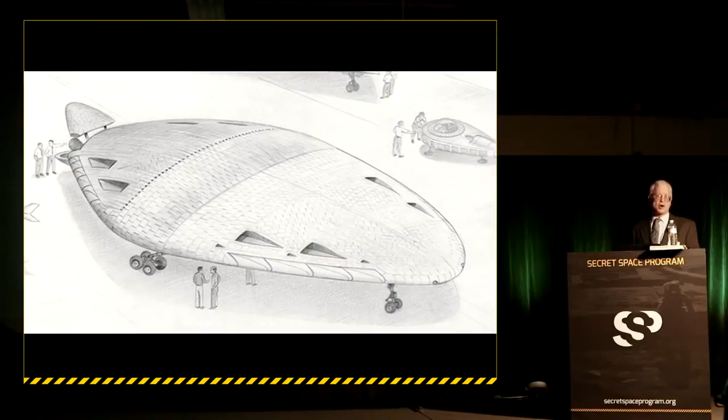This is the first generation Aurora. It was a remotely piloted vehicle, built by Lockheed Martin. This object you can see in the distance was actually taken from a Polaroid photograph, taken in 1984 near Cedarville, California, up in the northeast corner of the state.

Now for me, this is one of the other vehicles here. This is a drawing put together by my friend Michael Schratt. This particular vehicle I'll go into a little bit as well. It was part of a crash recovery in East Germany.

Now, after I got out of high school, I realized that in order to go to... okay, there we go, sorry about that... one of the things I was going to need to do to go to the college I wanted to go to, which was a place called Art Center College of Design in Pasadena, I wanted to design cars for General Motors.

And this was the premier college that all the designers would go to. At $2 an hour minimum wage at the time, I knew there was simply no way I could afford to save up the money to go there. So I decided to join the Air Force and get the GI Bill to help pay for my college education.

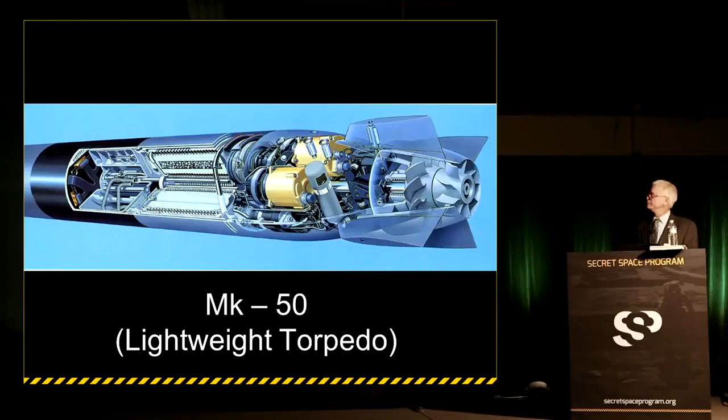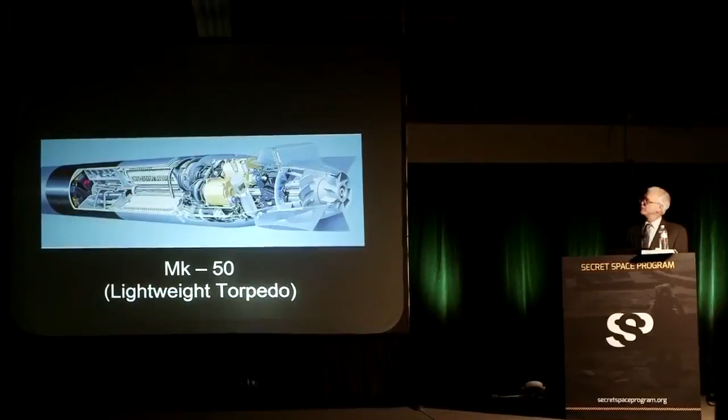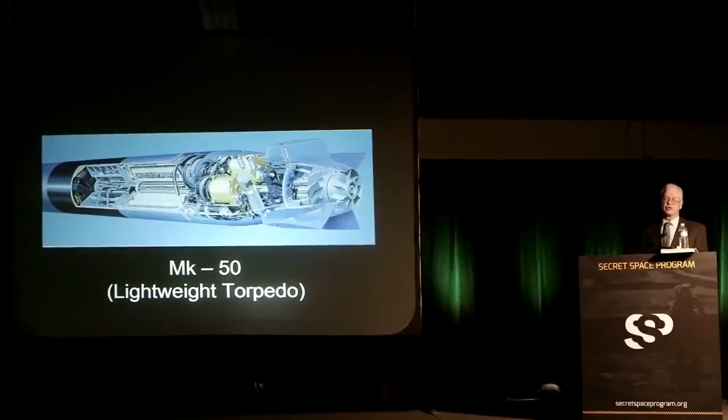These are some of the paintings that I did. This is a cutaway illustration of a propulsion system for a lightweight torpedo that basically involves a lithium core that is ignited once it drops into the water, and that heats up an oxidizer, flows through here, creates high temperature steam through these heat exchanging tubes, goes through a transmission, drives a generator, and also a couple of counter-rotating props in the back.

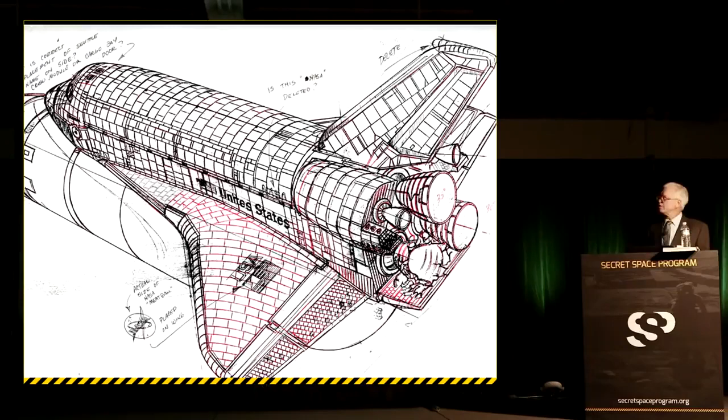Being able to figure all that stuff out, and I take a lot of pride in the accuracy of my work, involved a certain amount of engineering. Even though I'm not an engineer, I don't have an engineering degree, I spent an awful lot of time studying how things are put together, how they work, what makes them function, what the physics and the engineering are behind these systems. Whether it's mapping out every single tile on the space shuttle or doing the cover of a magazine on the TR-3.

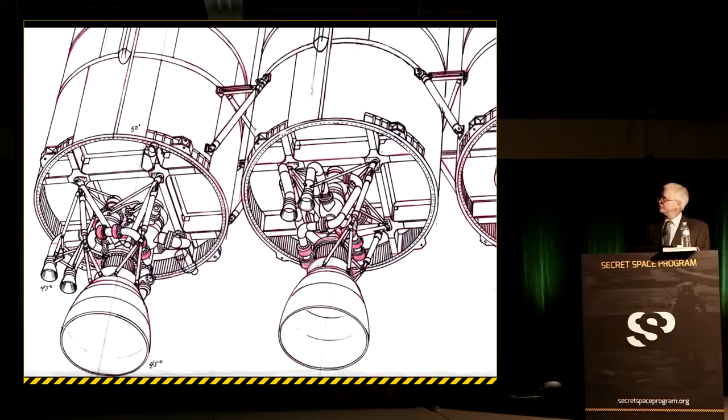Eventually, while I was working in the industry, I had the opportunity to make contact with a lot of people in the military, some of whom expressed an interest in having some of my artwork in their squadron ready rooms. So I was able to arrange to get what are called media orientation rides and go up in these planes and see how the pilots handle the stress of flying.

I asked myself years and years ago, millennia ago, if man had never taken the time to study flying insects or birds or bats or any kind of flying animal on this planet, would they ever have had the inspiration to think of flying, to come up with the idea? I kind of wonder whether or not we ever would have been able to get off the ground if we hadn't had those other naturally occurring creatures to give us inspiration.

As we began to learn how to fly, as the Wright brothers and all the other pioneers put together these machines, it gave us this capability. Of course, there was a military application. The first was probably seen during the First World War in Europe, using aircraft for observation or for bombing and harming the enemy troops.

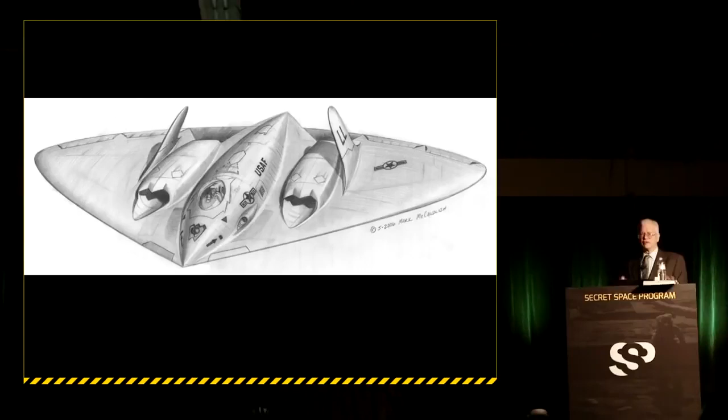There are ways that you can modify the inlets for the engines so that when a radar beam from a distance is looking at the sky where the aircraft is, it's harder for that radar to get into the inlet where those metal turbine blades are turning and reflect a lot of energy back, letting the people watching know that you're there. Applying these different techniques, looking for ways to make an aircraft perform better and do it very quietly, very stealthily, even in the materials that are used.

I'm sorry, I pushed the wrong button here.

These aircraft have a number of ways in which they can be deployed. They can be deployed by flying right off of a runway, or they can be deployed as a parasitic aircraft, as in this case. This is the second generation Aurora on a carrier vehicle.

There have been a number of questions about what the name of this vehicle was, but for me, the discovery of its reality was kind of what led me down the road to being aware, or suspicious anyway, that there was a kind of secret space program.

The way this happened, I was approached by Lockheed Martin - I think at the time they were still referred to as only Lockheed. The particular division that approached me was working on behalf of the Skunk Works division. They said we have a new aircraft that we want to build, and we need to get the appropriate funds from the government.

So we need you to create an illustration for us that shows an aircraft that's really fast, something that looks dynamic, very, very fast. At the time, I was reading trade journals like Aviation Week and Space Technology, and I knew one of the up-and-coming technologies they were talking about was something called scramjet technology, shorthand for supersonic combustion ramjet.

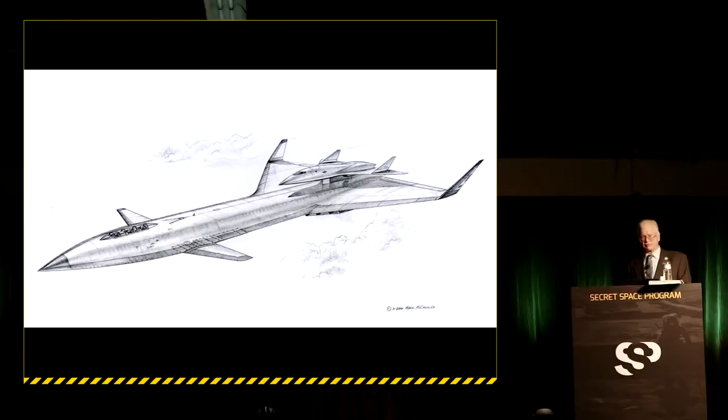It turns out that shortly after I submitted a sketch of this particular aircraft, they decided they were just going to completely scrap that. So I wound up doing an illustration of an aircraft something like this.

There was one proposal where it might actually be possible to deploy this particular aircraft right out of the back end of a flying C-5A Galaxy. This is sort of my conceptualizing of how many you could actually fit into a C-5, knowing the size of this aircraft.

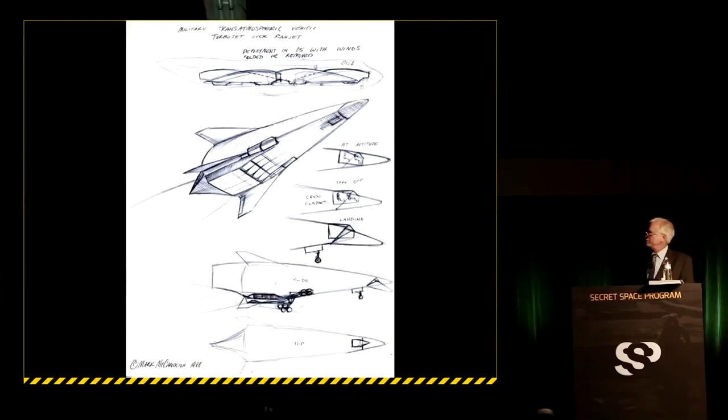It had a scramjet nacelle on the ventral surface, and also one on top. This particular version only had one underneath. Because of the shape of the aircraft, it made it very peculiar, or awkward, where the landing gear would come out in order for this thing to work properly.

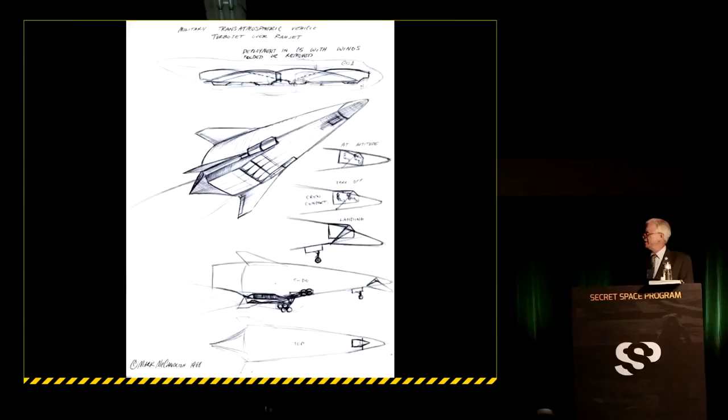Now, about the same time, there was a lot of talk about an aircraft vehicle crash that had occurred somewhere near Barstow, California. There were some people describing different features of the aircraft. There was a fellow that I met and talked with who was

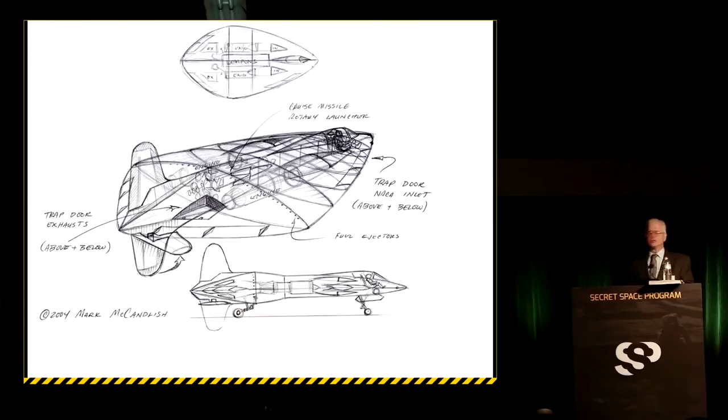friends with a number of the astronauts, and they were describing how a particular astronaut was flying a Learjet, ferrying it from one location to another through the state of Nevada. He came out of the clouds and found himself sitting slightly above and behind an aircraft that looked just like this. Now, the interesting thing about this aircraft is that it had some very strange features.

It had engines buried inside the fuselage with a sort of NACA duct inlet. There was kind of a slot in the back. It looked like there was maybe a trap door, control surfaces along the bottom, exhaust diffusion. But it also had this very interesting feature, and most people don't know this: the predecessor of the SR-71 Blackbird, the YF-12A, which was kind of a strategic aircraft used for missile delivery, also had a folding ventral vertical stabilizer, or tail. So this aircraft obviously had that same feature.

The vehicle was all black, or sort of a deep gray. As the pilot was flying along, looking at this thing through the clouds, he suddenly realized that if he had not seen it directly, he might have collided with it as they were flying through the clouds together. So he gets on the radio to his ground control and says,

I've got some traffic up here, why didn't you warn me? And they said, well, there isn't any traffic up there. And he says, well, of course there is, I'm looking right at it. It's black, shaped like a flattened-out football, no wings to speak of, two tails, one above, one below. There was a slight pause in the transmission back and forth, and suddenly the pilot turns around, looks out the window, registers an expression of surprise and anger, banks into the clouds, and disappears.

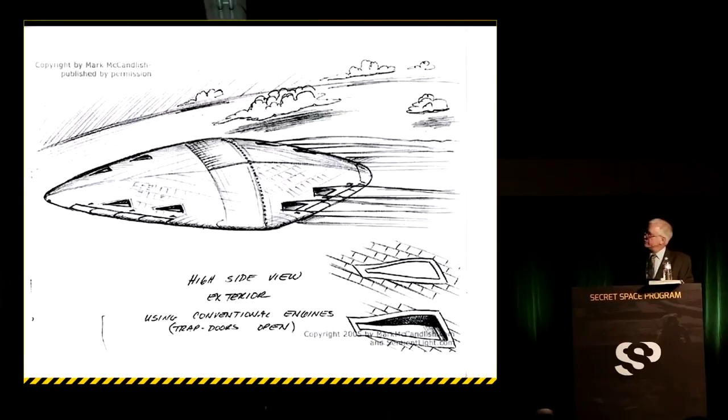Now, one of the things this particular aircraft had that wasn't immediately evident was a ridge that ran laterally across the widest part of the aircraft. And on that ridge were a number of what looked like fuel ejectors or fuel injectors pointing outward.

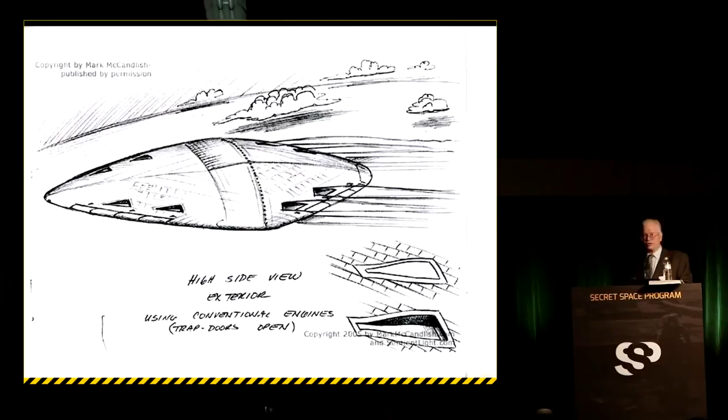This aircraft was being described within the industry as a vehicle that would produce an exhaust trail, the so-called 'donuts on a rope' exhaust trail. It seemed to imply there were two different propulsion systems in use to get it up to speed. Nobody really understood what they were or what made the aircraft function the way it did.

As it happened, I was asked to do a painting for Popular Science on the so-called Mach 6 spy plane, and it went into details about seismic events in Southern California that raised the curiosity of some people watching what was going on.

I remember at the time, this was in the late 1980s, early 1990s, that you could go out into the high desert of Southern California at night and see these things flying overhead, flying back and forth. When the sun was just below the horizon, it was dark out, but there was something still up there. You could see it moving, and moving very quickly.

About the time I did that illustration for the magazine, I was contacted by a colleague, a friend I went to college with, and I invited him to go to an air show at Norton Air Force Base in San Bernardino, California, about 75 miles east of Los Angeles. The Thunderbirds were going to fly, and it was a bit of an overcast day, but in the end I wasn't able to attend, mostly because I had to complete another illustration for a client over the weekend.

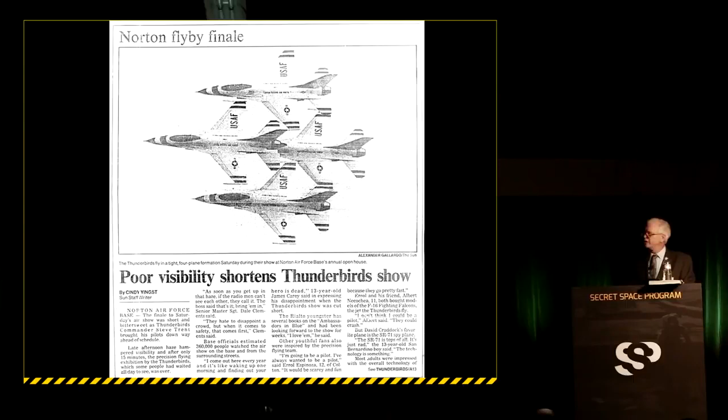As they were going into the hangar, the gentleman turns to my friend and says he just realized there are some aircraft on exhibit here that he's not cleared for, security-wise. 'You are not cleared to see these aircraft. So just enjoy the show, walk around, listen, take a look, but don't say anything to anybody.'

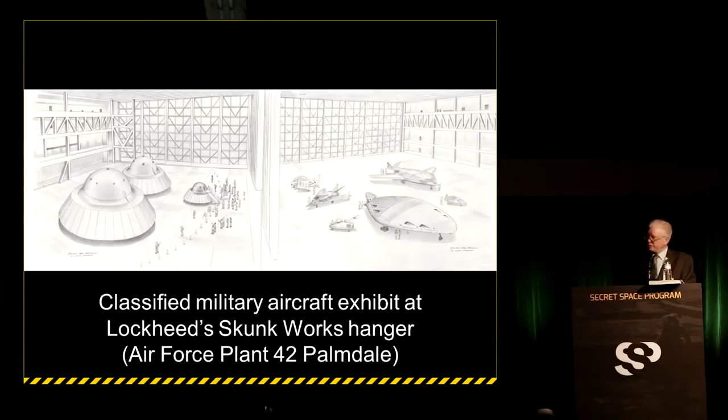Oh, I'm sorry, right here. This particular vehicle here, this is kind of a close-up, a rough close-up.

It was sort of an answer to or a follow-up to the A-10 Warthog, which was an anti-armor aircraft. It's a vehicle that carries a very big Gatling gun, fires thousands of rounds per minute, and is very durable, very hard to take out of the sky. It's very heavily armored, with a big gun that sits inside of it.

This aircraft was designed with a very unusual kind of wing. In aerodynamics, they have something called the Coanda effect. Basically, it involves blowing air across the surface of a wing to provide lift rather than just relying on the movement of the wing through the air to provide that same lift.

So the design of this aircraft was that they came up with a way of mounting the engines above and slightly ahead of the wing, using high-temperature alloy shaped like a flattened funnel that blows right over the wing. When the wings are all rotated in sequence, it forms a smooth ramp that the air can flow down, going from horizontal, following the surface of the wing with this Coanda effect, a kind of aerodynamic adhesion. It redirects the thrust of the engine to a point where it's pointing almost straight down, right about where the center of gravity is for the aircraft.

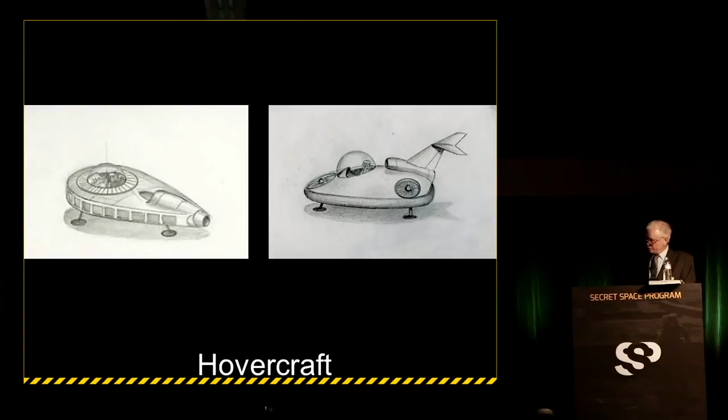The hovercraft were kind of unusual. There was one that had a jet engine in the tail, kind of a teardrop shape, and around the perimeter it had a series of little trapdoors that would open and close as it was flying along. This jet engine also had a transmission connected to a set of counter-rotating turbine blades that surrounded what amounted to a bubble-type cockpit, almost like something George Jetson would be flying in one of his cartoons.

This one over here, I've actually seen a version very similar to this in one of the popular science magazines, where it had a turbine in the front and two in the back, one on either side, driven by this particular engine through a transmission of sorts. It had the same kind of sphere-shaped cockpit too.

Senior Peg was the code name given to the development of the advanced technology bomber, and this was Lockheed's version. You can see it's kind of a derivation of the F-117A. It has the same kind of faceted surfaces, which help reduce the radar cross-section, or the amount of radar reflected back to an antenna from a source inside enemy territory. It had flush inlets on either side of the cockpit with a screen over them to prevent the turbine blades from reflecting a lot of energy back out to a signal source.

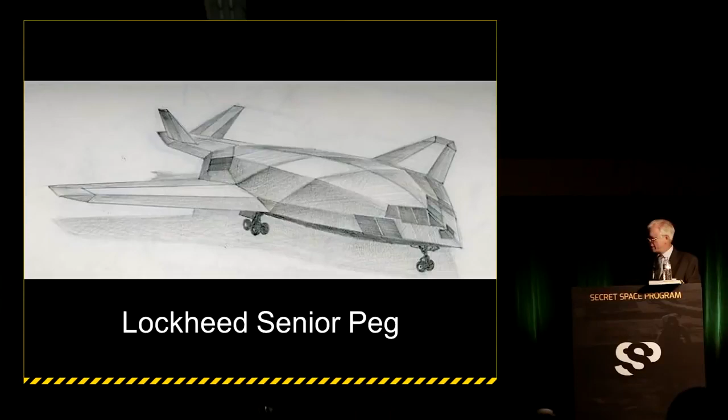But this here was one of the more interesting vehicles, and you can see some of the stats on it down below. This was probably one of the largest unmanned weapon systems built to that time. From my different sources in the military, this aircraft, known as the first generation Aurora, nicknamed the Pulser, was entirely covered with space shuttle tiles.

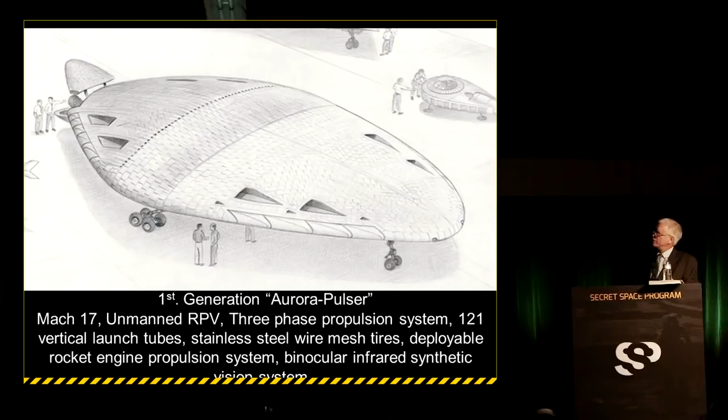You can see evidence of the tiles all around the surface of the aircraft. Just like the aircraft I showed you earlier that had the tail above and below the fuselage, this aircraft had NACA duct style inlets for 4 engines and 4 exhausts, both on the top and on the ventral surface, or the belly, of the aircraft.

After I discussed this particular weapon system on Coast to Coast with one of the hosts who was working that program, I received some email from a number of sources indicating there were inlets and exhaust ports both on the top surface and on the ventral surface. At the time of the exhibit, my friend said he could only see the underside of the aircraft. He couldn't see the top of it because it sat up kind of high off the ground, so he didn't know whether there were 8 exhaust ports or only 4.

It turned out that one of the people I corresponded with after doing the radio program said they had been jogging late at night during an evening when an aircraft like this was leaving one of the United States Air Force bases in Great Britain. He said what was unusual is that when it took off and lit up the afterburners, which dumps a lot of extra fuel into the exhaust stream, you see a bluish glow coming out of the exhaust. He said there were 8 ports, which helps point out that you have 4 above and 4 below.

So we knew that was true. One of the things that was interesting about this aircraft was that it had that same system of fuel ejectors not only on the top surface right along this ridge, but also on the ventral surface on the underside as well. So here we have two different propulsion systems incorporated into one aircraft.

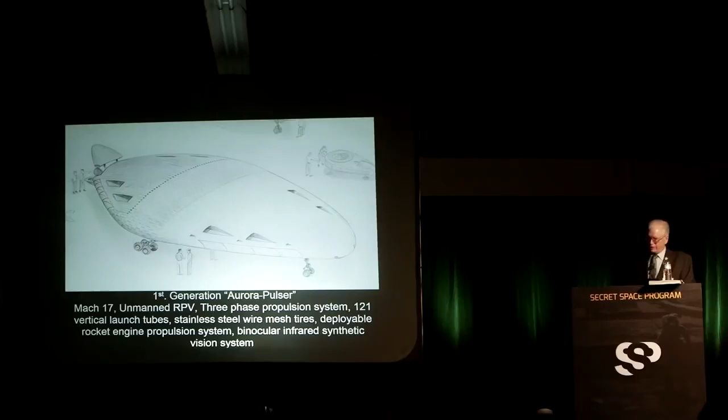Now, one of the things you don't see in this particular illustration, but is a little more evident in this one I did for Aviation Week—the perspective on the underside is a little off, these should be flattened out more—but there are 121 vertical launch tubes in the belly of this vehicle. Each one is capable of carrying something like a cone-shaped reentry vehicle, like a MIRV, which also suggests deployment from outer space.

The way the system would work was remarkably simple. It had a kind of tile with explosive bolts holding it in place on the outer skin, and sitting behind it, the weapon would be held in place. It's not shown here, but I've subsequently learned there was a three-piece fiberglass sabot which would hold the weapon straight in the bore, so it would always point a certain direction. The ingenious and simple aspect was that when the explosive bolts on the outside were ignited, the tile would disintegrate and blow away.

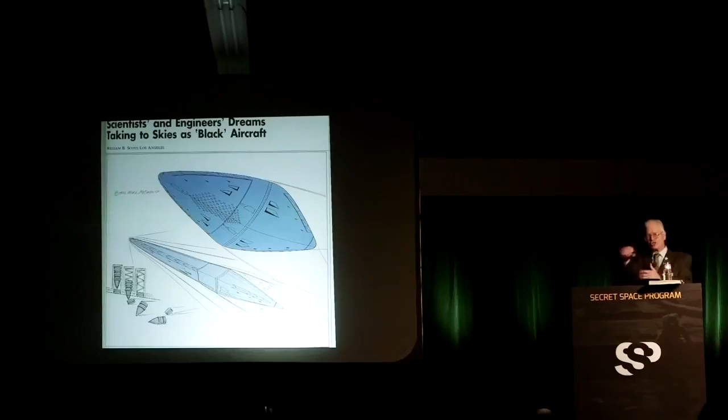And when it did, there was a big coiled spring about 12 inches in diameter behind the vehicle that would push it out of the hole. Right behind the reentry vehicle, another tile would slam down into place and cover up that hole again, almost in a tenth of a second. The reentry vehicle would then stabilize, because of its center of gravity weights and shape, in the airstream, go into the atmosphere, and be able to acquire its target and do its job.

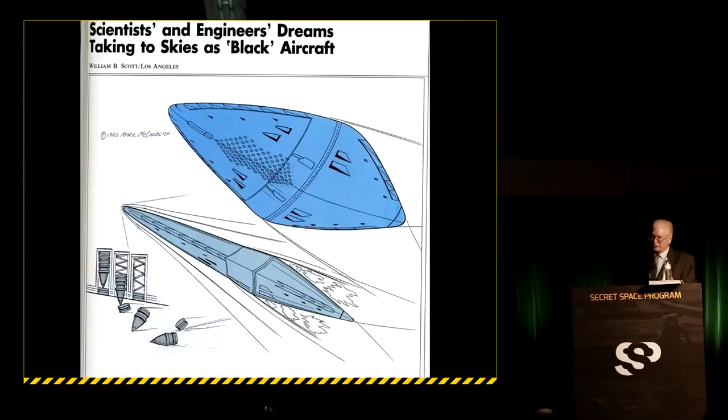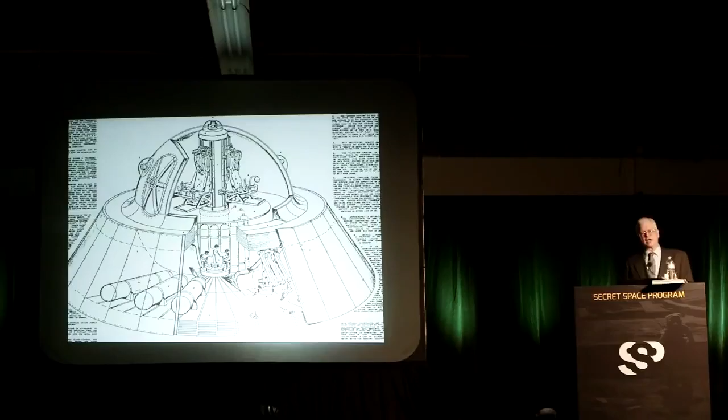If you think about it, there's a process used throughout industry, and even in the dental industry, called centrifugal casting. What you do is create the mold and whatever components you want to go in it. You have a sprue in the middle, and then you take the molten component and pour it into the center of the mold through a funnel-shaped opening.

If the mold is spinning, the molten material flows out to the outer edges and pushes away all the little air bubbles that might get trapped, and they migrate back to the center where they can be drawn out. So you wind up with a single casting with all these components in it that will not have any air bubbles, inclusions, or impurities that could cause the system to short out when you're using millions and millions of volts of electricity.

But even so, when I computed the total weight of all that metal and quartz, 24 feet in diameter and 12 to 14 inches thick, it worked out to something like 24,000 pounds. So you have to ask yourself, how can something that weighs 24,000 pounds get off the ground? Especially if nobody believes that something using the Biefeld-Brown effect could actually levitate something that heavy.

One of the things the witness said was that the greater the mass of the dielectric, if you dope it with other materials like uranium or something of that nature, you can actually enhance the effect. So here again, material science comes into play. It becomes very, very important in how things happen.

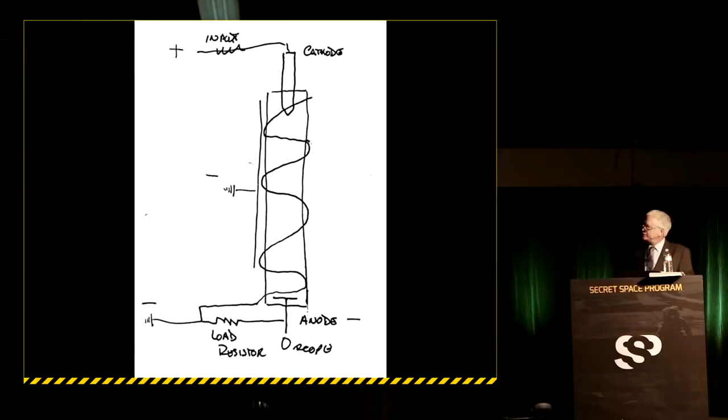So I started looking at what zero-point energy is, where it comes from, how it can be manipulated. I looked at some of the papers written by scientists like Bernard Haisch, Alfonso Rueda, Hal Puthoff, Daniel Cole. In the early 1990s they wrote a number of papers that actually described this, and you can see the similarity between the two things. You can see that there's clearly a design similarity.

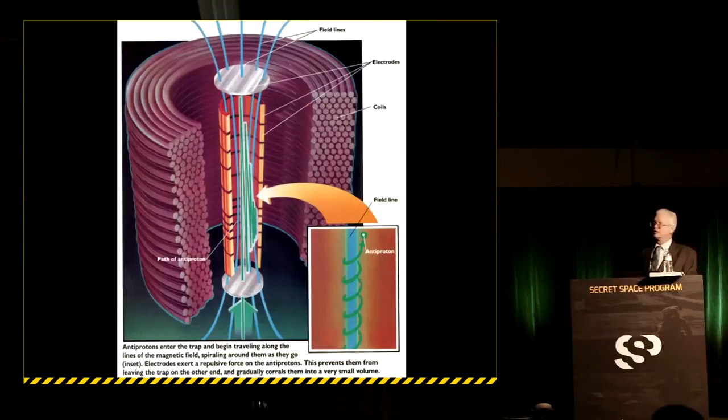And yet I looked for other possibilities as well. The possibility that we had something like an anti-proton trap going on here, where there might be some aspect - you have the same kind of coils going around the outside, a central column, a way of trapping antimatter. I thought that this might be something like the so-called antimatter drive used in some of the Star Trek vehicles. So I began conceptualizing, began looking at different ways that you could actually make this system work.

Somewhere in the late 1990s, early 2000s, I came across a number of books that described - Joseph P. Farrell, who's another one of the speakers here, had found some historical records after the Second World War that described a device being worked on by the Nazis in the Wenceslas mine up in southern Poland, called the Nazi Bell Project, or Die Glocke.

That particular system, based on the documents that were found, was made up of a pair of counter-rotating cylinders, one inside the other, with a coil that went around the outside. And electricity was being fired through the system. So I started looking at ways that you can make that work.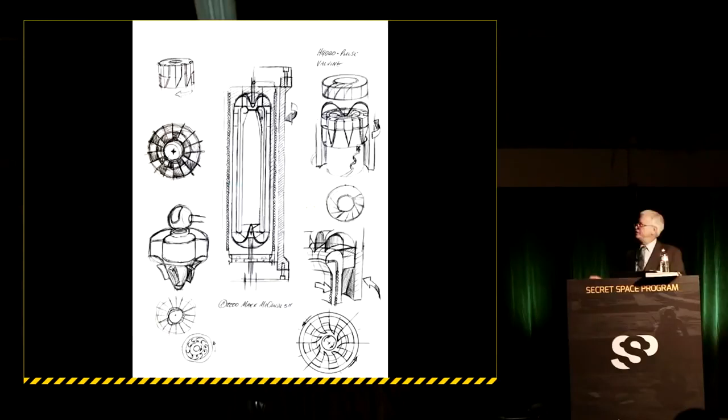The first thing I thought of was that if you put a lot of electricity in this thing with big coils around it, you may wind up in a situation where you can't get an electrical motor to actually drive the system, unless you had a pulley system sitting way off to the side, away from the electromagnetic fields that would interfere with its operation.

But I found out that, of course, mercury has some interesting characteristics. I think there's something referred to as the nuclear spin ratio - the particles in the nucleus of the atom of mercury and the electron shells have a spin ratio of something like 60 to 2. And bismuth, by the way, also has the same kind of property. I thought it was interesting that these two materials had these unusual characteristics that might make them very important in the operation of this kind of thing.

This goes all the way back to Michael Faraday. The first electrical motor was really just a puddle of mercury with a permanent magnet sitting in the middle of it in a petri dish.

He had a little scaffold off to one side with a copper conductor, and he put one wire into the mercury, sent it over to the battery. Another wire would hang down from the top of this scaffold. The minute you connected the circuit, the mercury would begin circulating around inside the petri dish, around this magnetic field.

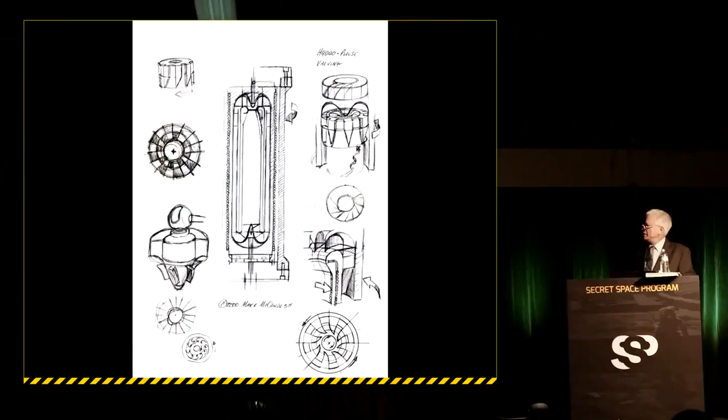If you look at the way the field lines are set up in this particular vehicle, you can see the field lines basically go out around the outside and stroke down through the middle. By setting the system up this way, you already have the built-in mechanism to make this thing rotate on the inside, just like Michael Faraday's little motor from back in the 1820s, I think it was.

The other thing I realized was that you're going to have some way of circulating the mercury. In one of the instances I was looking at ways to mechanically do this and get this counter-rotation thing going that was described in some of the papers from the Nazis' experiment, I was creating a kind of planetary gear drive system.

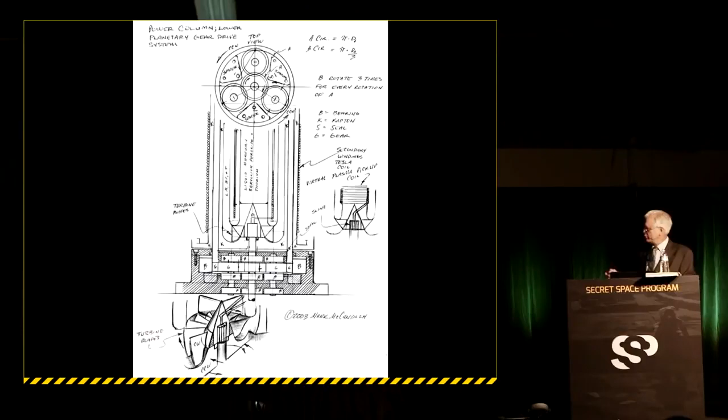This gear drive system would sit either at the top or the bottom, so that as one of the cylinders is turning one way, the gears would force the other cylinder to turn in the opposite direction. The benefit of this is that when you have things turning in opposite directions or sliding across one another, you get this vorticular motion in the mercury.

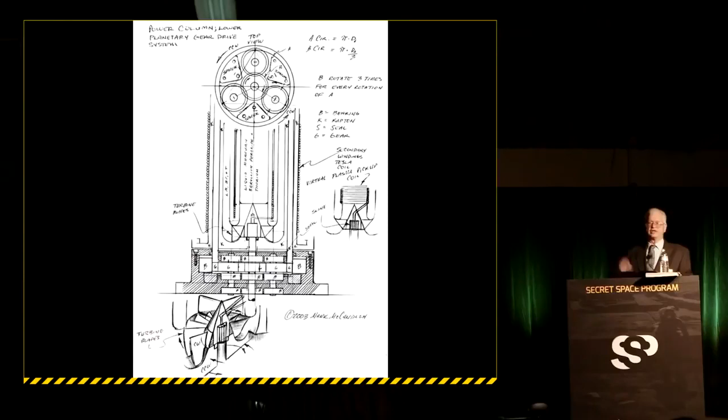It seemed to me that this particular vorticular motion was something very significant, very important to the operation of the system. And it's all leading up to the tapping of zero-point energy, which I'm going to get into here shortly.

The idea was that the mercury would come up in the gap between the two cylinders, reach the top, and be forced down through this venturi, this little funnel-shaped opening in the bottom. You'd have your cathode up here at the top, and a ring embedded in the quartz of the interior cylinder. This is the other cylinder on the inside here.

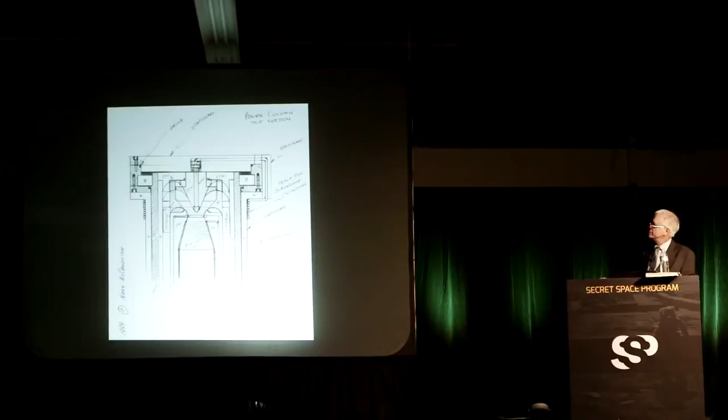You'd have coils inside so that as the mercury was being charged with electricity, it would cause the mercury to be circulating. But because the cylinders are turning in opposite directions, you get this natural tornado-like vortex formation in the movement of the mercury through the system.

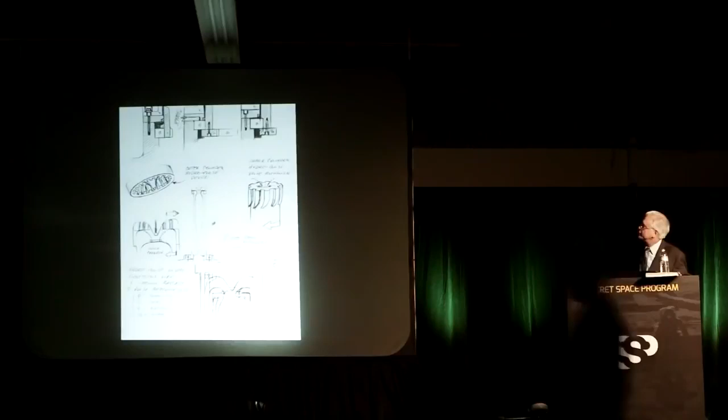Now, the next thing I did isn't as easy to see in this particular diagram. I wonder if the next diagram has a little bit better way to see it, right here, down here in the corner.

You see the mercury comes up here, and it goes down through this opening, and then right below that second electrode that's shaped like a ring, you get the electricity jumping from there to there as the mercury is being pumped through by the natural flow caused by the electricity going through it.

As a sudden discharge of electricity goes through the mercury, and the mercury is spinning the whole time—spinning like a tornado—you send the electricity through it, and when you do, it creates a phenomenon very similar to when a smoker blows a smoke ring.

If you've ever studied a smoke ring, you can see it's caused by a sudden discharge of smoke from the lips of the smoker, and the surrounding still air slows down the outer edge of the smoke as it's being expelled. This creates a self-stabilizing event where the smoke forms a perfect ring. Even dolphins can do this with the air blown out of their blowhole.

Now, the other thing about that is you find that as this phenomenon is moving downward, it's probably approaching something like supersonic speeds down through this central column here.

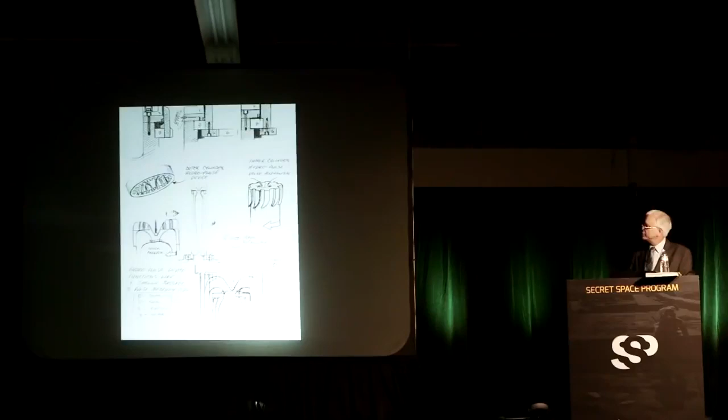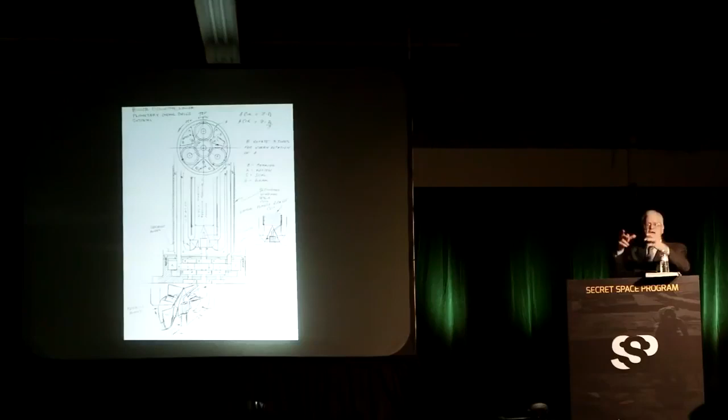There we go, down through the center, right there. That's because of the rotation of the device, creating a kind of a smoke ring of ions, highly charged ions that are blowing down through the center of this device, but you also have a precessing, a rotating around a horizontal axis and a vertical axis, so that you have this twisting motion that goes on.

And so what that actually winds up simulating is ball lightning, which is a naturally occurring phenomenon. It's noted for its ability to be self-sustaining. It creates its own electromagnetic field.

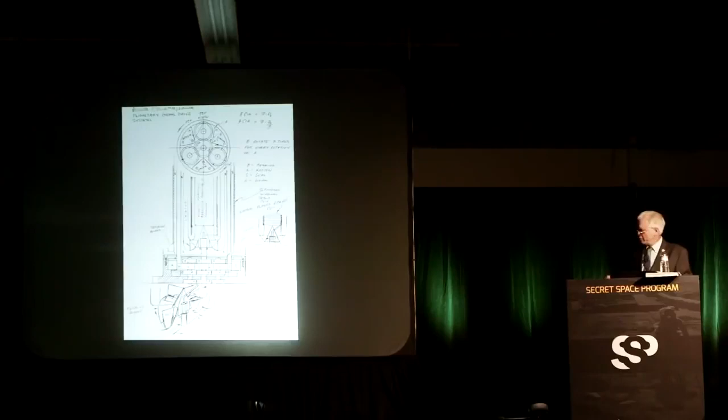So in the process, what I really think I've stumbled across is a way in which this system has three different electromagnetic fields. It has the one created by the primary windings of the Tesla coil. It has the windings in the center that also create their own electromagnetic field.

But then when that plasma ring, or I should say it's actually a sort of low temperature plasma-like phenomenon, or a virtual plasma, fires down through the center, it also creates its own set of electromagnetic field lines. So what happens is you have an effect that's very similar to the electromagnetic pulse that occurs when a nuclear bomb goes off.

Well, they actually have a weapon. It's called the explosively pumped electromagnetic pulse weapon, and it does the same thing. What it does is combine overlapping electromagnetic field lines, and then using explosives, it pinches all those magnetic field lines and creates a powerful pulse.

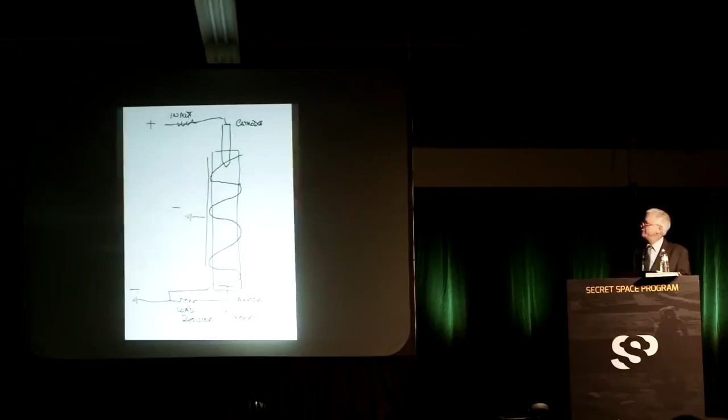And so what I'm suggesting to you is that process actually forms a kind of doorway for tapping into this zero-point energy. Now, why is that significant? Why does that mean anything? Well, part of the reason is that this device, when it taps into zero-point energy, they've shown that zero-point energy is actually responsible for the effect of gravity, for inertia, and for mass.

And so if you're pulling some of that energy out of the environment, it may be, even though there's an infinite amount, some of the latest figures are 10 to the 109th power joules per cubic centimeter. That's one of the latest figures I've seen. That's a monstrous amount of energy.

That's enough energy that if you took all of the energy that's in this amount of space-time and were able to tap it, it would be able to boil off the oceans of the entire planet. So you can see how this technology makes a hydrogen bomb look like a firecracker.

That's probably one of the reasons why there's such a tremendous effort to suppress it, because in the wrong hands, obviously, it could be weaponized and be very dangerous. But if used in peaceful ways, of course, it provides you a tremendous amount of power.

And that power, when pulling this energy out of the environment, it's my belief that there is a moment in time where it doesn't allow that zero-point energy to interact with the atomic structure of the vehicle. Now, this interaction is what is referred to as the creation of mass.

Now, for example, Einstein said you can never travel faster than the speed of light because as you accelerate through space-time, your interaction with the zero-point energy that's embedded in space-time raises your mass. And so it makes it harder and harder for you to go faster and faster, so you can never really reach the speed of light.

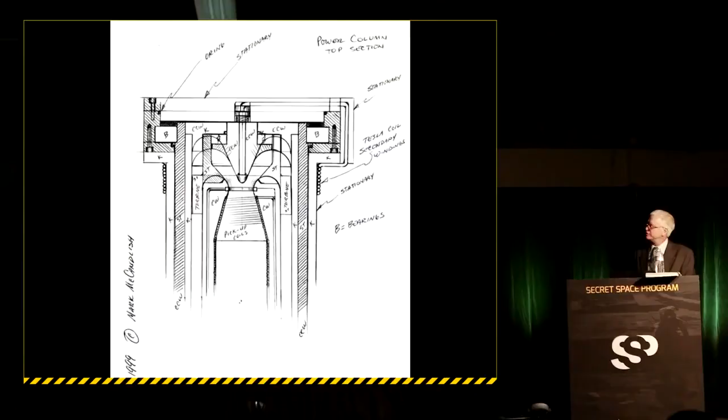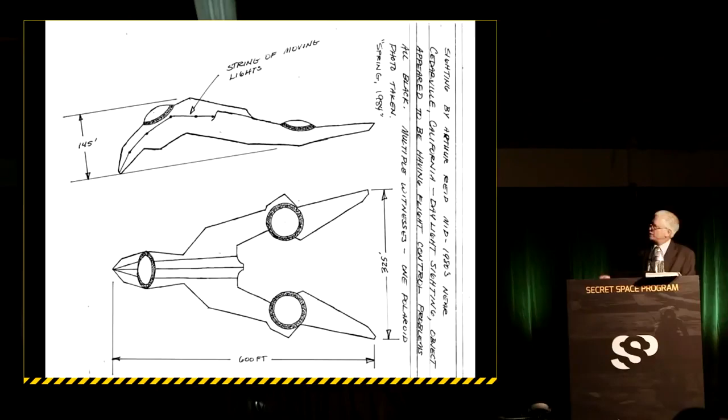Under a loupe looking at the original Polaroid, you can actually see a little bit more detail. This was a drawing done by the eyewitness, the fellow who took the photograph. There were some things about it I could go into, but the important thing to remember is that some of the features look remarkably like some of the structure on the so-called alien reproduction vehicle.

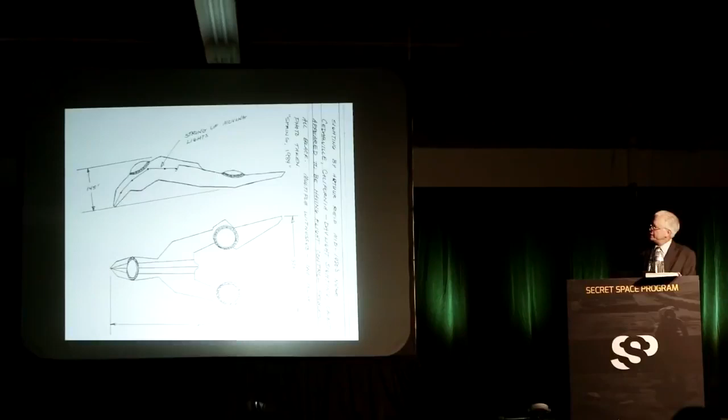It did seem apparent to him that these wingtips, if you want to call them that, could actually rotate inward so that this thing would become more of a triangular shape, which also would help with issues like storage.

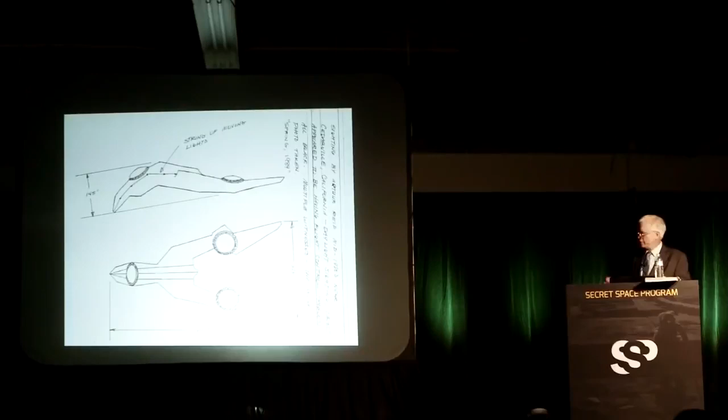Now, this is a little more detailed drawing I did based on what I could see through the loupe. It actually looks like there may be some ways in which this area and this area here can be articulated, so the thing can kind of fold itself up for storage or for putting it into a hangar.

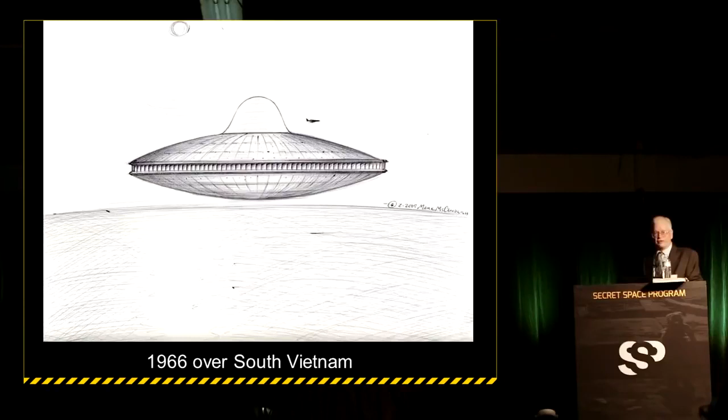There's a lot of other incidents, eyewitness testimony, pilots that I've spoken to. This particular image refers to a sighting that occurred back in the mid-60s on the way back to Vietnam. That aircraft right there is a B-52, which is a huge aircraft.

They said that this vehicle had a translucent illuminated dome that they counted 27 stories in, and that was kind of how they helped gauge the size of the thing. But he said that each one of the turbine blades, these rotating turbine blades around the perimeter, each one was the size of a bi-fold door on a huge hangar.

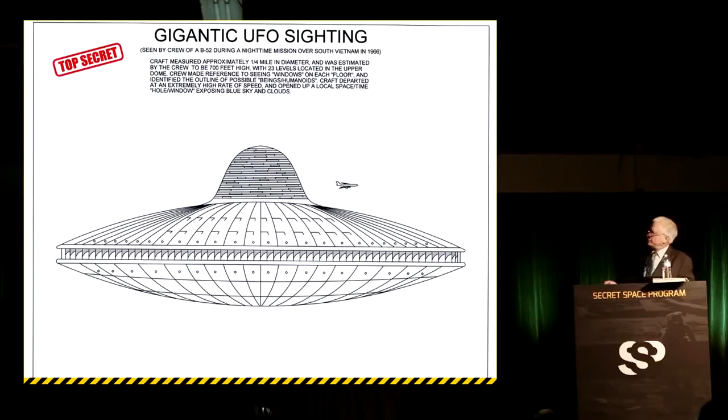One of the things significant about this particular encounter - this is based on an eyewitness, just a rough sketch here - is that this was taking place at night over the ocean at 1 o'clock in the morning, no clouds, just the moon.

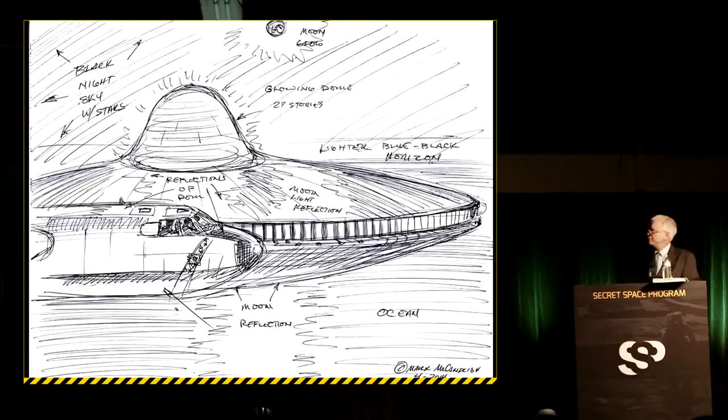And when this aircraft, this large disc, which they estimated to be a minimum of a quarter mile in diameter, when this thing departed, as it went out through the blackness in the sky, in its wake was this turbulent, shimmering image of what looked like a blue, daylit sky with clouds.

So what seemed apparent to the crew of this B-52 was that when this thing created a wormhole, there was actually kind of an image dragging that would go along with it, that it would either show you where it was going to or you'd see some of where it had come from.

Now, I've personally witnessed that on at least two occasions. And very often you find that these types of events are very mystifying and hard to understand because you don't readily understand what it is you're looking at.

Now, like I say, I'm running out of time here. This is a crash recovery that occurred in May 1989 in East Germany by some of our special forces. It was a vehicle that was utilizing what appeared to be a lot of stealth technology.

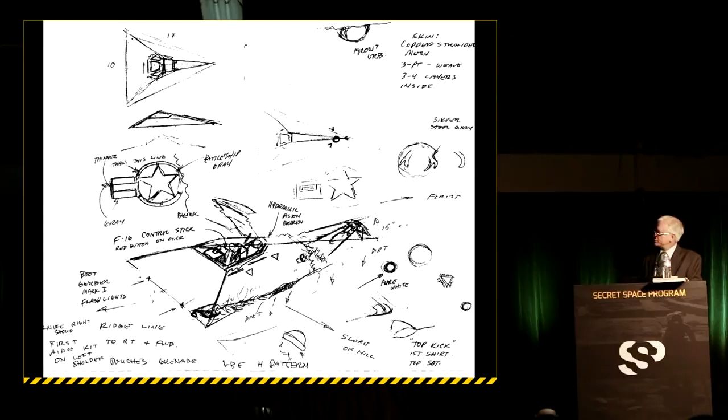The canopy on this thing had a lot of the same kind of details that you would see on the stealth fighter - the same sort of jagged edges, same sort of features that would help to defeat radar reflection, things of that nature.

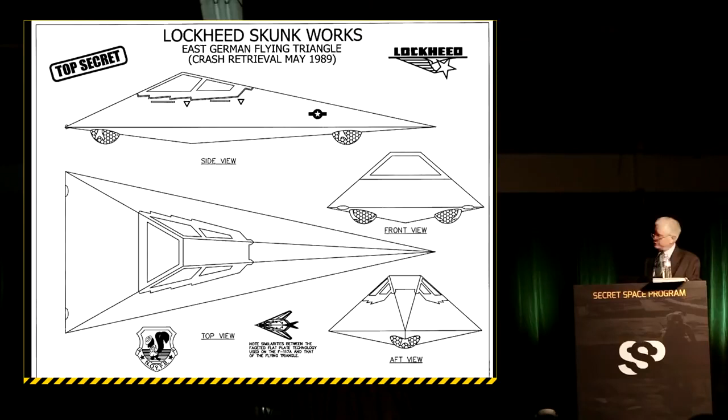This is a mechanical 3-view drawing done by my friend and colleague Michael Schratt, who I owe a lot to for helping me put this presentation together. But what was interesting about this particular vehicle was that it had these spheres that appeared to be made of a white ceramic material, like a superconducting ceramic, like yttrium, barium, copper oxide.

When the vehicle crashed, the pilot hit a tree coming over a ridge line and then tried to pull the nose up. He hit tail first, and when he hit tail first, it broke the tail in half, and it released one of these spheres.

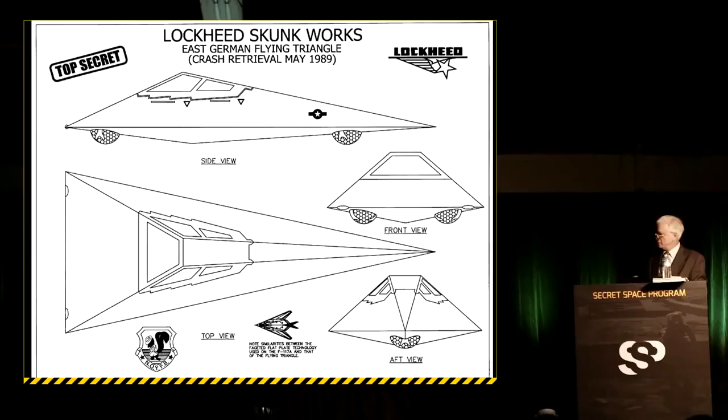That sphere looked pretty much like this. It had a couple of wires coming out of the top. There was a little circular opening with a metallic thing in the middle. But it had this beautiful pumpkin shape with a scalloped appearance.

He said that when the thing was bobbing around the field and they were trying to recover it, every once in a while it began to spin and wobble and get a little faster, and then sparks would jump across the two exposed wires, and it would slow down and start to calm again.

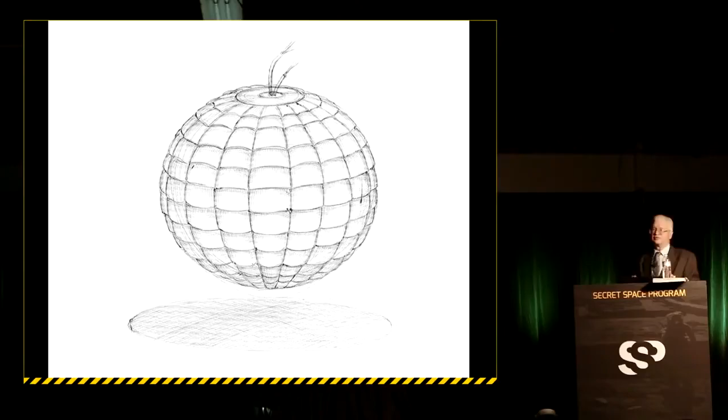They were given an aluminum utility case to try and capture this thing, and they were told not to touch it with their bare hands. So there's two reasons I can think of: either they're using cryogenic fluids and it's really cold and they might get a burn, or they might get an electrical shock, which seemed pretty apparent.

But the thing was floating above the ground. One of the things we know about superconducting materials, in the context of a propulsive system, is if you've seen films on YouTube or the internet of superconducting wafers floating above magnets, they have to be set, as it's referred to, in situ, in order to create that levitating effect.

In other words, you have to chill that ceramic material down right at the spacing you want to establish between the magnets and the object itself, so it'll maintain that attitude. You can crank it to a certain attitude and it'll maintain that attitude, and you can move it around, but it'll always stay in that one reference angle.

So I started thinking that if this thing is filled with some kind of cryogenic fluid, and this is some kind of high temperature superconducting or ceramic material on the outside, the scalloping may actually create a kind of turbulence pattern on the inside that helps stir it up. And one of the things we know about superconducting materials is that when they get anywhere near moving magnetic fields, they produce a lot of electricity.

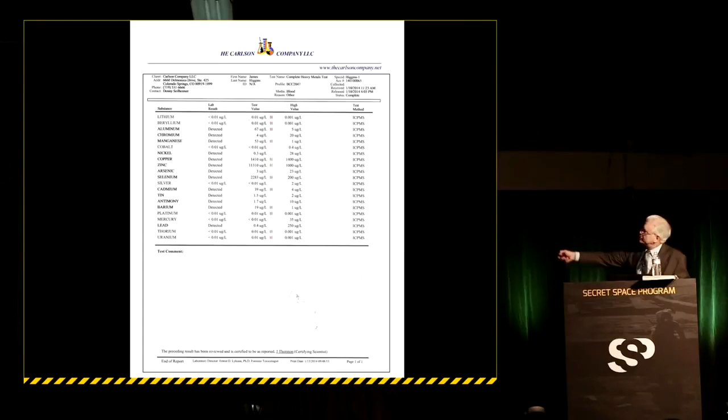The manner of his illness was so peculiar and strange that we decided to have some pathology done. What we found, it's hard to see on this chart because it's so small, I wish I could blow it up, but basically all of these little things with an H next to those levels are radioisotopes like uranium, thorium, beryllium, cadmium, things you would not find naturally occurring. So it seems apparent to us that he was poisoned using radioisotopes.

I would like to dedicate this presentation to the memory of my friend James Higgins. He was a brilliant young man, had great potential as a filmmaker ahead of him, and I thank him for the time he dedicated to documenting what I did. I'd like to thank you for your time and attention. Thanks very much.